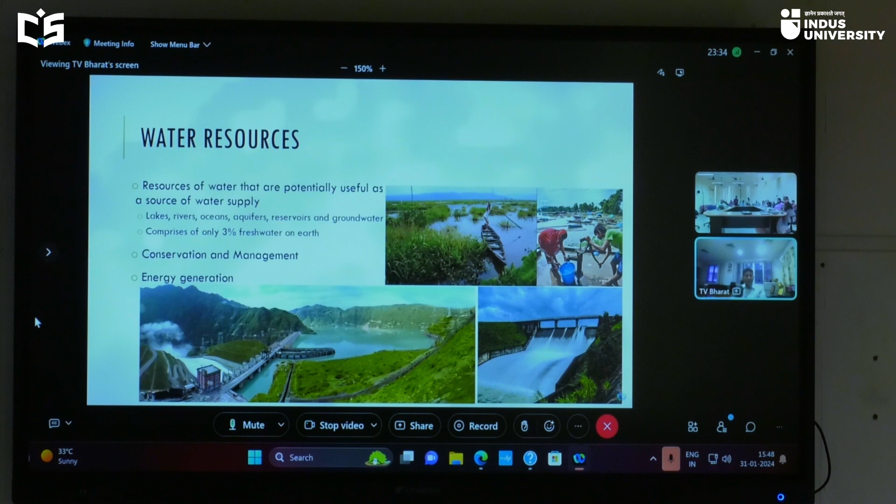When you talk about water resources, which is one of the prime subjects under civil engineering, it is essentially to manage and conserve the water resources, which are pretty much like lakes, rivers, oceans, aquifers, reservoirs, and groundwater, etc. Except for oceans, freshwater resources are around 3% only. So when we talk about management, it is the management of this 3% of freshwater on earth, because the rest is in oceans. Even now, we are trying to tap those waters and use them for drinking or other purposes.

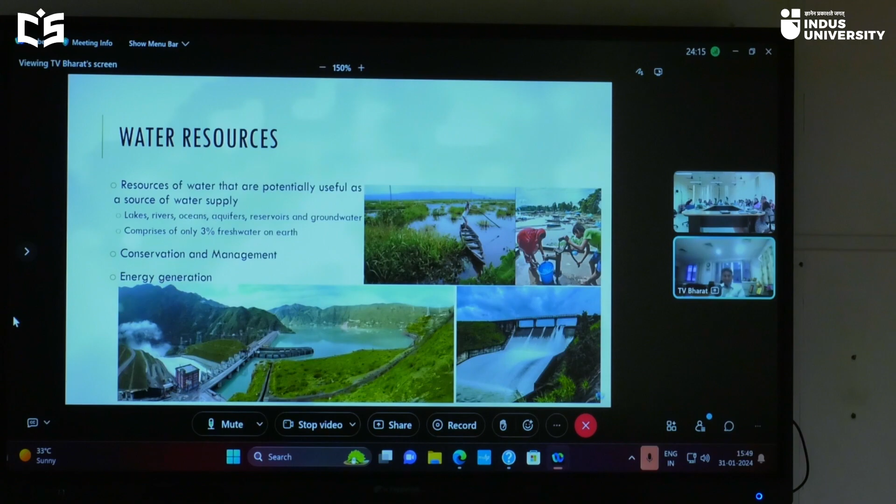There is also another important aspect in water resources, which is energy generation through hydroelectric projects and other things. So pretty much this is encompassing the water resource field at present.

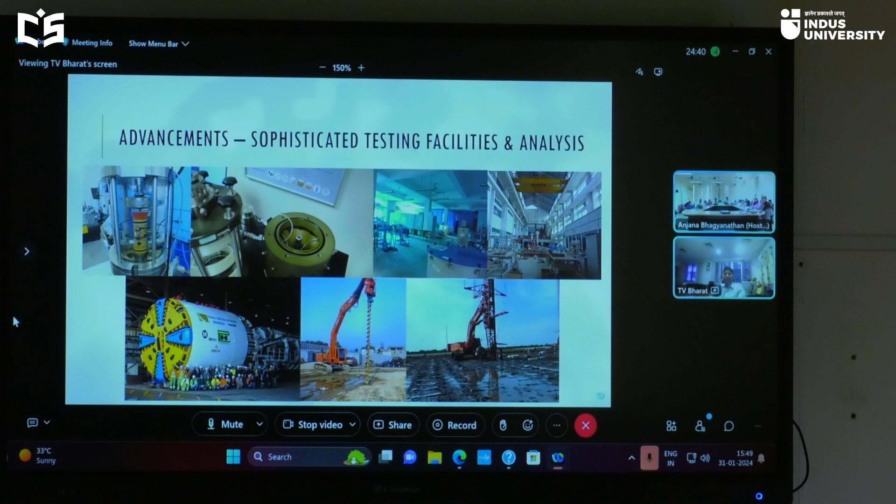There are advanced techniques that have been developed in areas like water resource engineering and geotechnical engineering to manage and mitigate certain problems and manage the resources, especially for example creation of dikes, treatment of groundwater, and many other techniques, including detection of groundwater using geophysical techniques. All such techniques are available. There is also creation of hydraulic structures such as dams, reservoirs, etc.

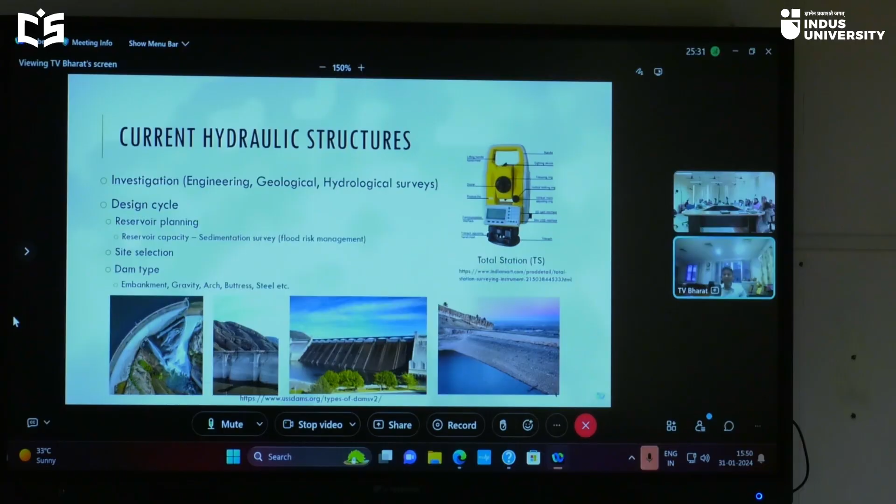Very nicely prepared modules are available for the creation of these large water bodies or structures. Surveying is a very important part of this—total station survey, and even now satellite surveys are also commonly used. Reservoir planning and life cycle assessment are very, very important for the creation of these large water bodies and structures.

To detect groundwater availability under the earth, there are geophysical techniques, starting from drilling to remote sensing and many other things. So this much advancement has taken place. Now the question arises: what kind of IKS, or Indian Knowledge System, intervention are we looking at from this point of view? That is what I'll try to address.

Whenever you talk about water resources combined with environment, very often there is a conflict. For example, this is a hydroelectric project in Himachal Pradesh where I was a consultant, called Kol Dam. This particular spillway got pushed towards the water body, and the structure got a huge wide crack. For repair work, during the dry spell, they created a dike by dumping resources, and water was extracted from here. There's a huge utilization of certain chemicals for creating hydraulic sealings within the water bodies.

Similarly, when you create hydroelectric projects, this is about a 44 megawatt hydroelectric project in Arunachal Pradesh, place called Rupa, where I've been involved. Huge landslides took place, and the tunnels got blocked because of a landslide that happened around 2-3 years ago during COVID time, and after that it triggered again the next year. Such environmental challenges occur because the landscape is changing due to creation of these water bodies.

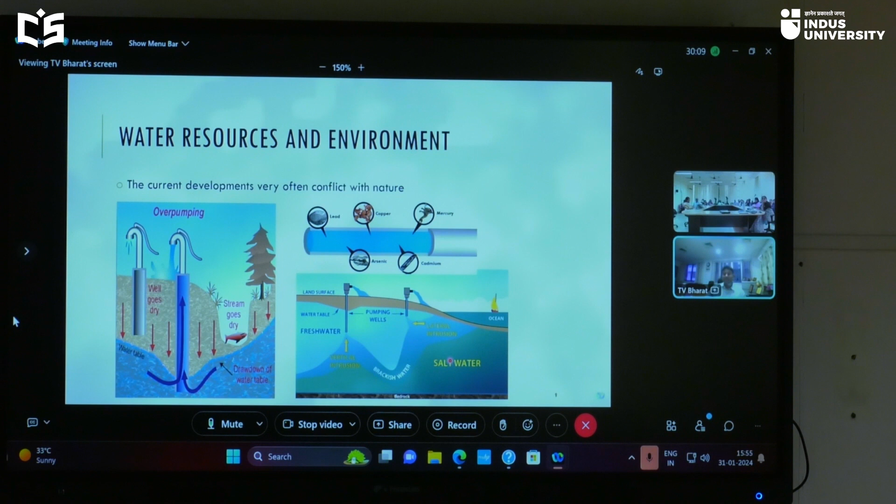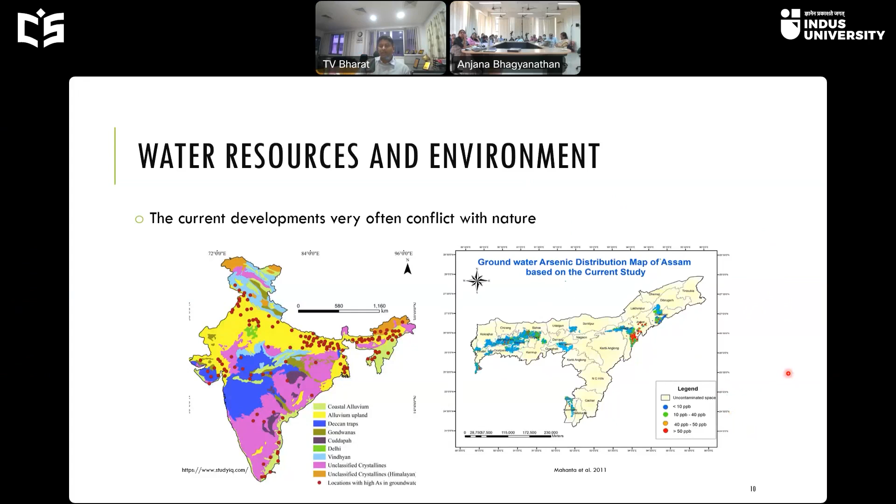This gives some idea of how the heavy metal called arsenic is distributed across the country, as well as in the Assam region itself. A very high percentage of arsenic is currently available in many parts of Assam, because although we have a huge water body like the Brahmaputra River, most of us are dependent on groundwater, and this groundwater is completely contaminated with heavy metals.

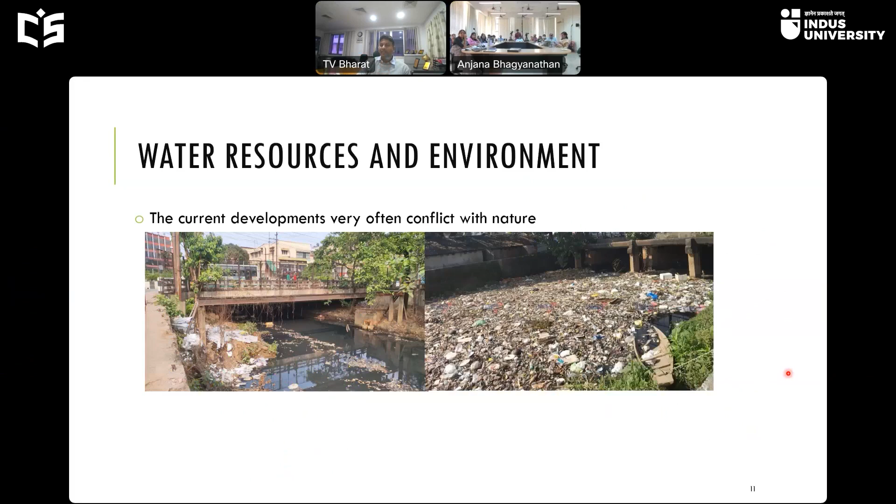Apart from that, there's the way we treat water bodies—by dumping waste directly, creating lakes as drains, or creation of drains, and simply discharging effluents from industries directly into the water bodies. The current treatment is just whether BOD or COD markers are achieved or not; if they're within limits, you can simply throw the effluents into the water bodies. Otherwise, where do these industrial effluents go?

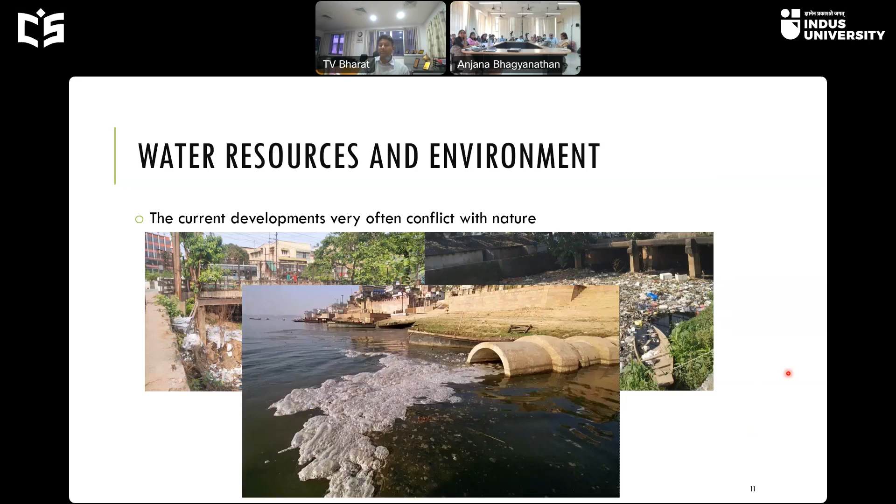I'm sure many of you are aware of Bellandur Lake in Bangalore, where surfactants polluted the lake recurrently many times. This happened repeatedly over many years, because surfactants from industry directly entered Bellandur Lake and created this kind of situation.

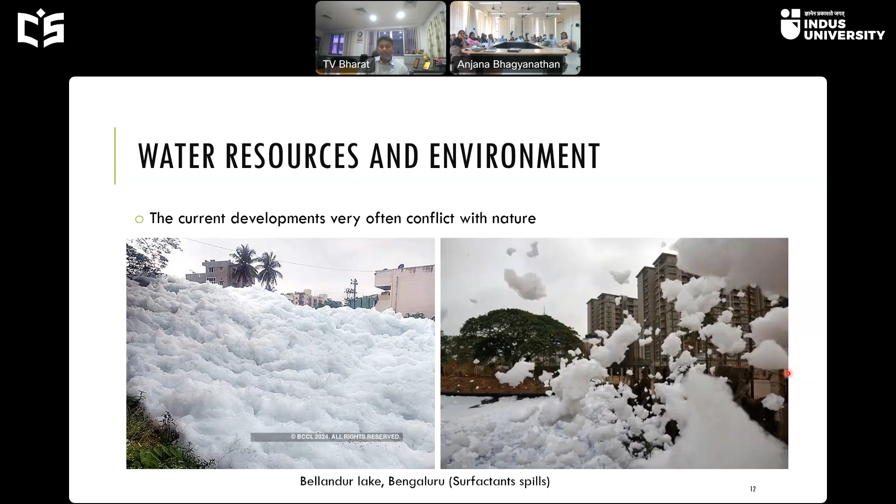The problem is whenever new wastes are introduced, such as construction and demolition waste, called C&D waste. Wherever you demolish a building, that cement or concrete waste, if mixed along with the MSW, releases high ionic strength salts. Then the osmotic efficiency of the liner or the bentonite available there would not contain the waste. It will simply allow the waste into the ground.

This practice has been existing for ages or several decades. But now a lot of research is going in, which means these concepts are not completely backed up by research. They are still in developing stages. We are still risking our environment because these contaminants are entering into our food cycle. We are still allowing it because our research is not completed. This is the fact.

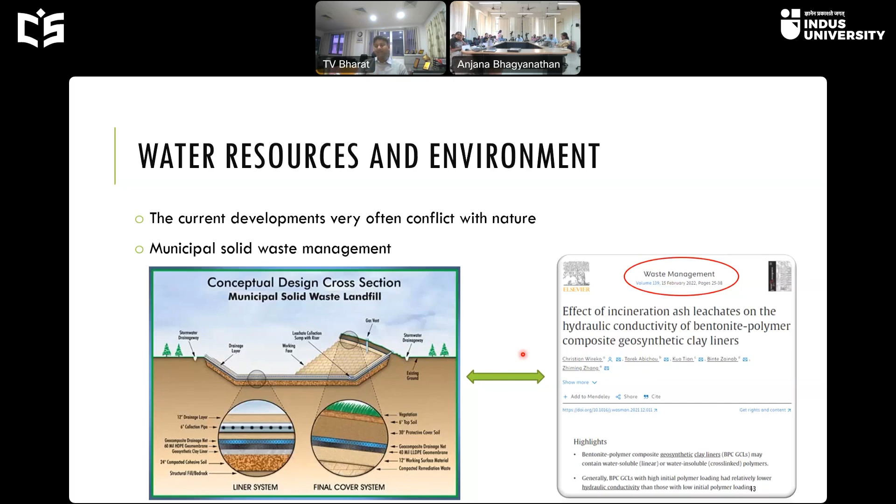But here my focus is not on waste management, but rather on water harvesting systems. What I showed you is that currently, whatever practices we have, often there is a conflict with the environment. We are in a fix about how to protect the environment at the cost of development, or at the cost of creation of energy, or at the cost of hydroelectric projects and extraction of energy. That is where we are.

These are some of the water harvesting systems we get to see even now because they are still existing. But are there any sources or references to understand how these things were made? Let us try to explore a bit.

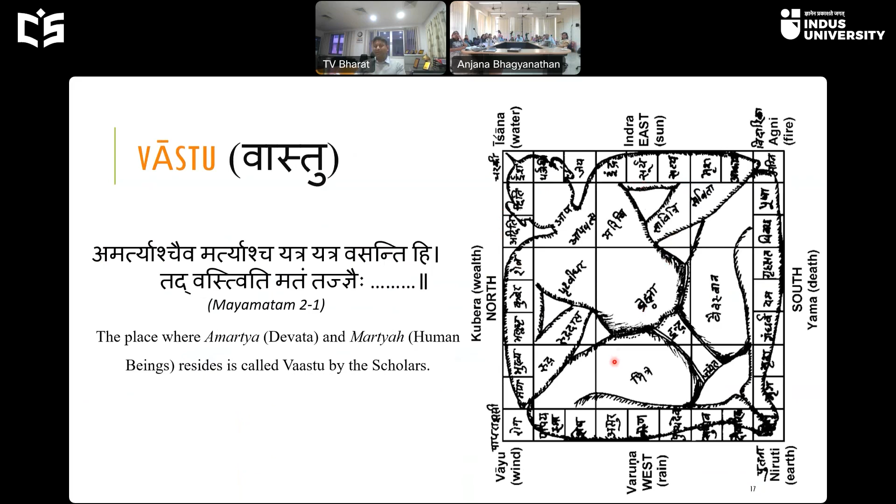Only the creation of spaces, urban space, or any other space, for creation of a building or something. But this is also Vastu because devatas exist there. Amartyascha Martyascha Yatra Yatra Vasantihi Tad Vastviti Matam Tajjnaih iti Mayamatam - Mayamatam explains that Vastu is where the Amartyas, Devatas, and humans coexist together. Therefore, based on the presence of these gods or demigods, the placement of different vastu or rooms, or the creation of spaces, is actually discussed.

But Vastu is a very wide subject. I'm sure before me, the speaker would have spoken from Samarangana Sutradhara, because based on the brochure, I know there's one specific talk on Samarangana Sutradhara by Bhoja. Actually, it starts from a detailed explanation of the universe creation or universe evolution.

And there are so many questions that Jaya asks the creator, and then he asks what is the shape of this particular earth, how this whole creation actually happened, and even how to create one particular soil, how to make the soil stand without collapsing. Such kinds of questions have been asked, and a very detailed treatise has been given there.

And in fact, it also discusses the mechanical contrivances, or the yantras. There is a yantra adhyaya in Samarangana Sutradhara. Right? So apart from that, there are hydraulic structures, which are not there in Samarangana Sutradhara very explicitly, but material selection and such kinds of planning are definitely present in most of the Vastu texts.

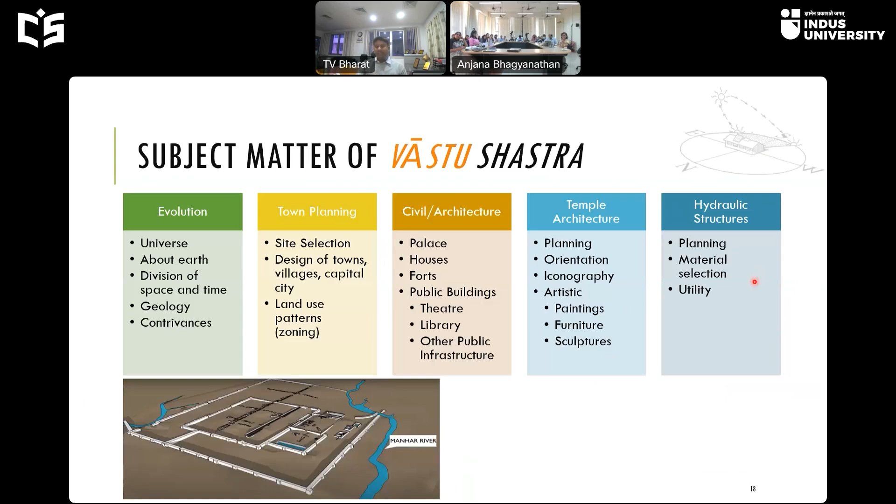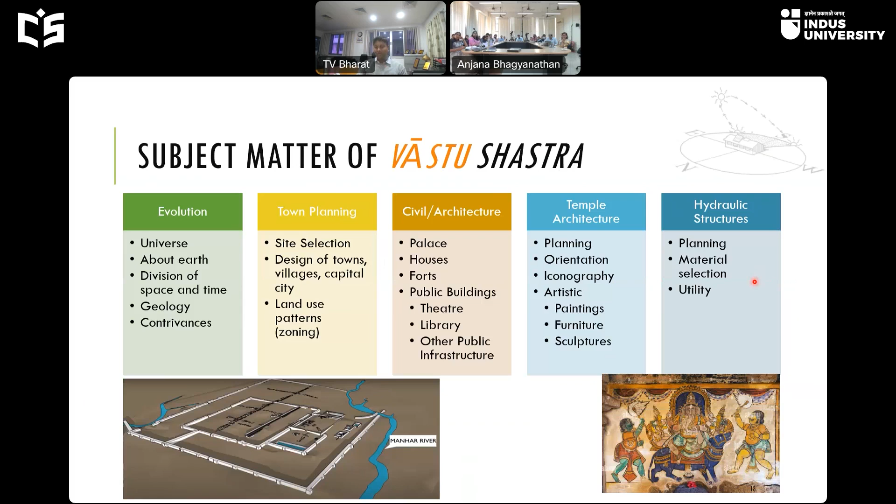So we get to see from the Harappan civilization, near the Manhar River, etc., the settlements and how this particular planning has been done, and also artistic things in many of the temples, which existed for thousands of years. Most of the companies who advertise paints would not last even for 10 years, right? But these existed for thousands of years on rock, and they are natural, organic.

So Vastu is a subject matter which has existed throughout history, and therefore it is Sanatanam, eternal, and it has a mention in the Rigveda, where Vastoshpate is addressed: Vastoshpate Anamivo Bhava. Actually, the one who bestows health. If you recall one of the slides I showed you, we did not really think of what happens to health when we discharge effluents into rivers or water bodies. But here, Vastu, if it is followed, actually protects the health of inmates, the health of all living organisms. So that is how Vastu has been used.

And there are Pravachakas. This is mentioned in the Matsya Purana. I will not detail it because I think I've been given only 40 or 45 minutes, I guess. Otherwise, this is a very nice verse. Bhriguratrirvasishtascha vishvakarma mayastata narado nagnajichaiva vishalaksha purandara. So these are all the preachers of Vastu. There are books from them also available, or there is a Shishya Parampara that actually came from them.

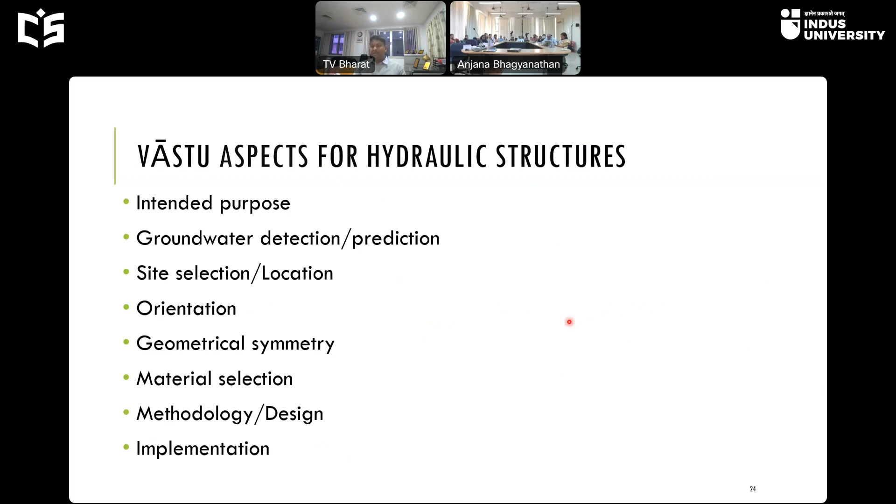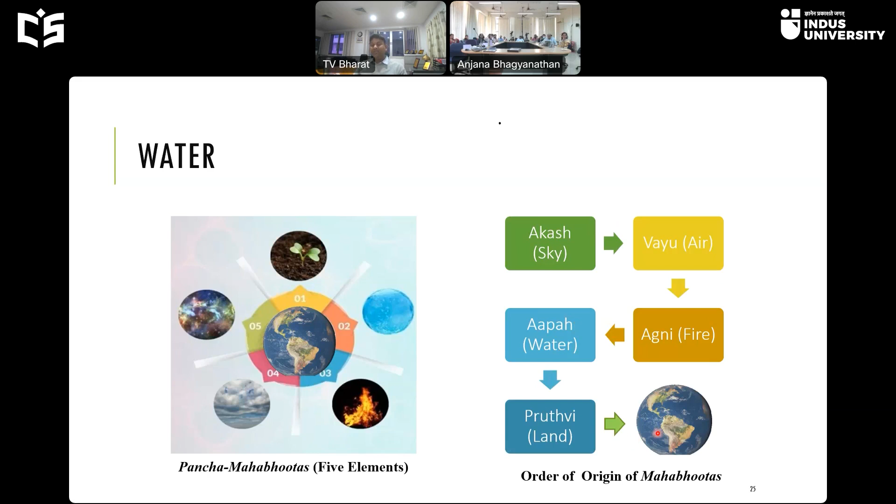What is the perspective of water, the Jala, in ancient India? This is one of the Panchamahabhutas, of course, which are useful for the creation of all different things on earth. There's a shloka in the Bhagavad Gita also: Akashad Vayu, Vayor Agni, Agnir Apah, Adbhyah Prithvi. There's the creation of Mahat, then these Panchamahabhutas, and after that all different objects. There is such a discussion at the beginning of Samarangana Sutradhara as well. This philosophy is vital for understanding material and the creation of any space.

The means of knowledge in ancient India is through the pramanas: Pratyaksha, Anumana, Upamana, Arthapatti, Anupalabdhi and Shabda. Without these pramanas, it is very difficult to understand, evaluate or predict anything. Pratyaksha Pramana is getting knowledge of a thing through a connection between the eye and that object. It could be the eye, ear, nose, or tvak, the charma, the skin. Through these indriyas you gain knowledge. But this is not sufficient, because when the indriyas directly contact these objects, you will not gain the entire thing unless there is an involvement of manas.

Because you will be looking at something, but you will not be gaining the knowledge unless the manas is also linked, and manas is actually bridging this eye with the object, right? So this pratyaksha pramana, these pramanas are so important to evaluate the knowledge, such as, for example, the groundwater prediction in ancient India is based on understanding or presence of certain features.

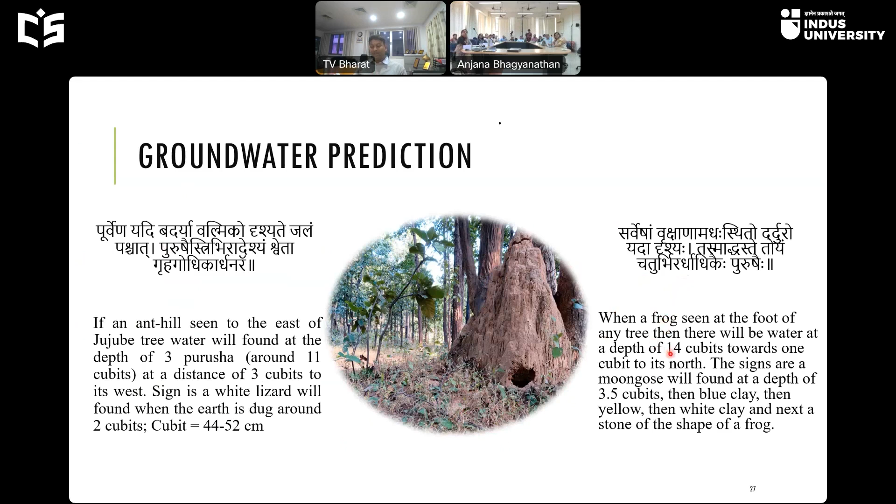And similarly, if you have seen a frog near any tree, near that you have water bodies, and there are certain other pramanas that have been given. Similarly, the presence of certain plant varieties also provides you information about presence of groundwater. So although it appears that this is very simple, and does it really work, right? But in fact, there were people who used to practice.

Professor Prasad from Sri Venkateswara University or Padmavati University from Tirupati used to provide solutions to many places, like Gujarat and many other places, where in the dry places he used to find water bodies based on these pramanas. This was in the 80s and 90s. Now he is no more.

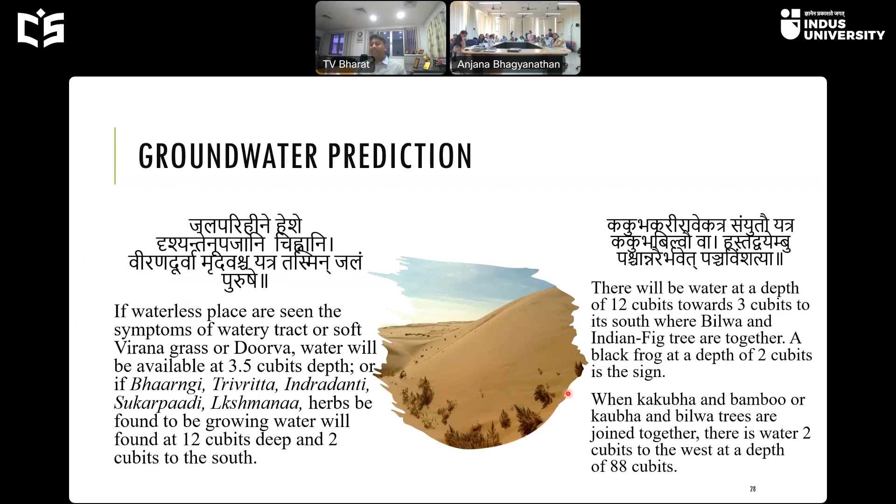So this particular knowledge is still valid, because there is a relation between certain vegetation, the plant biomes, and the water bodies that are available, and also the soil biome, lithosphere. This particular knowledge has been utilized for understanding the presence of groundwater.

Similarly, there is a certain discussion on the soil classification system. So Sita, Rakta, Pita, Krishna, these are the different varnas of soils, or colors of soils. So based on the colors of the soil, and similarly based on the smell and taste of the soil, and also the presence of different plant varieties, right, the soils are divided. So it appears that there is a Brahmana, Kshatriya, Vaishya, Shudra. Nevertheless, this perhaps means the utility of the spaces or of the soils for different purposes.

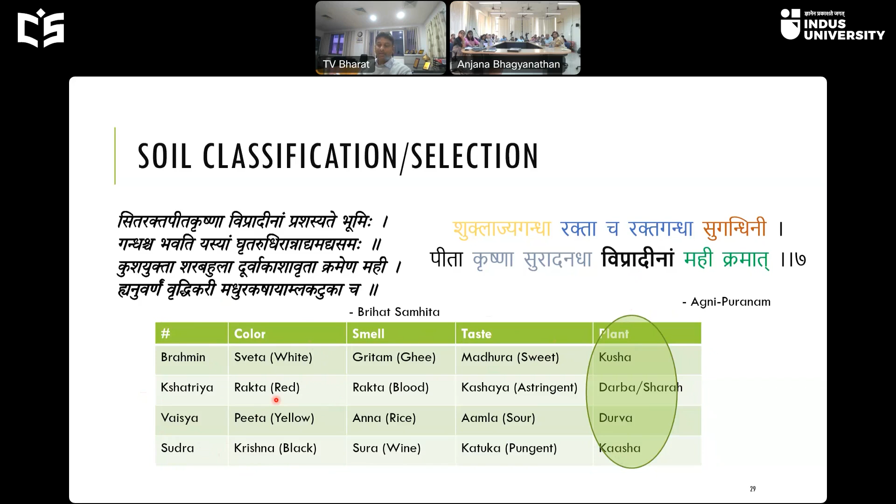For example, if you want to create a space which regenerates your mind, which regenerates your thought process, the Shvetavarna is ideal, right? And similarly, the Raktavarna, the red soil or the laterite soil, which contains high iron oxides. You will see in many places, mountainous regions, etc., that iron oxides are dominant, the laterite soil, red in color.

So if you have this particular soil, then the contractor will be very happy, because this is abundantly available, and this soil could be used for achieving a very good compaction. So you can go to very high compaction energy and then achieve very high densities. So this soil is good for creation of even large structures. So there is a kshatriya, where protection systems, etc. are required. So you can create perhaps large structures.

Similarly, this is a widely available land. There's a Pita Varna and Krishna Varna, which is related to planting and other things, there is krishi, and similarly there is creation of pots, etc. So these are directly dependent on this particular soil. So this is the utility of soil that is actually talked about.

And in fact, there are many other ways to classify the soils, because soils do not mean just presence of grains and water. That is a modern perspective of soil. But soil means there are certain microbiomes, from plant biomes also, that are available within the soils, and also there are certain micronutrients. These are all useful for nourishing bodies, physique, everything. So therefore, there is a direct relation between the type of soil we are living in and the way we behave. So the soils definitely would influence us, and that is how the classification has been done.

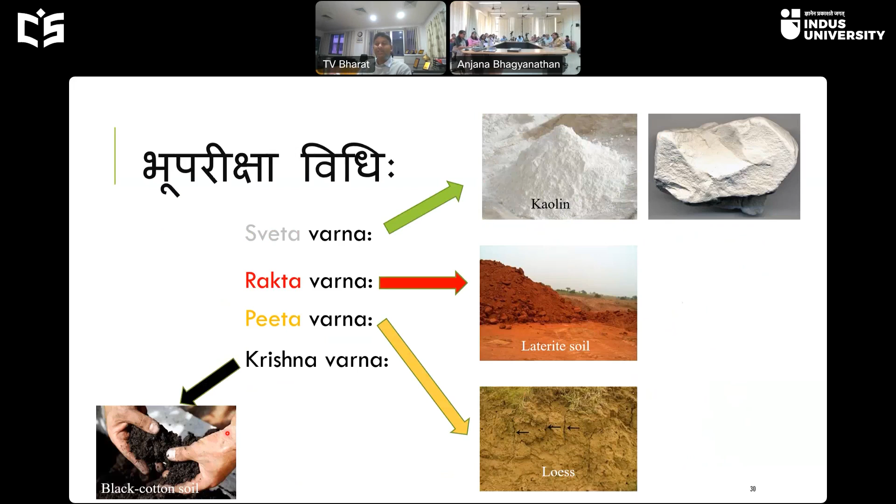And in many a place I do teach this particular course on Indian knowledge systems. Many a times people ask me, is it really a scientific approach of dealing with classification or any other thing? I explain one thing: the pramanas are something like this.

If you have one bird which is flying 2 kilometers away from the water bodies, and suddenly it sees that there is a small perturbation in the water body, it dives down and catches its prey. It dives down 2 kilometers to catch the prey. Did it see the prey? It's not possible. Even the cameraman could not capture the prey before it caught it, right?

So it is not possible, only based on the perturbation. The perturbation could be a natural perturbation, or it could be the presence of certain prey. So these pramanas are so powerful. Similarly, the marine snails can detect their food source simply based on the smell of the food, and they would not know where the food is until they use their sensing glands.

But humans have all these senses working, and the utilization of these sense organs is a main theme to understand or acquire knowledge. What kind of knowledge? For example, if you are trying to understand the type of soil, you ask the plants, because they live in there.

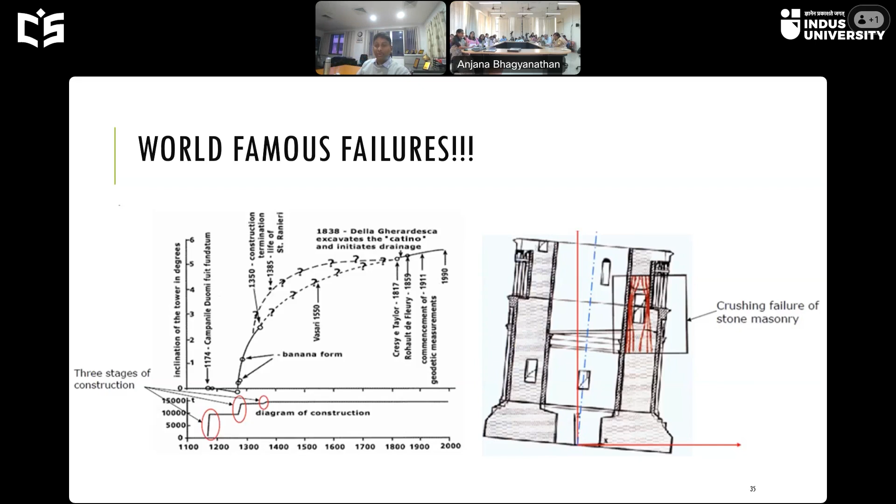Even now, the three-phase or two-phase systems are very difficult to deal with because there is no inclusion of microbial activity or micronutrients. And if you include them, it becomes a five-phase or six-phase system, and God knows when this will be solved. Some ancient structures based on this knowledge system are available even now. The first one is the Anangpur Dam.

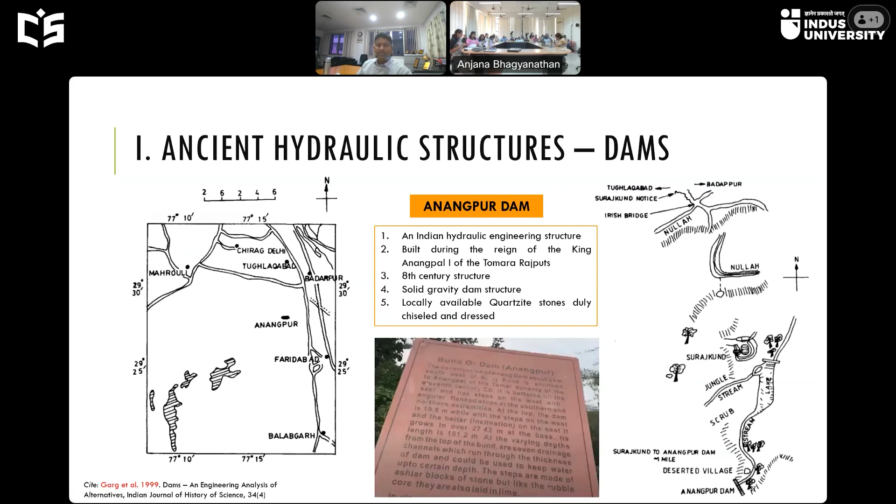The Anangpur Dam is situated near Delhi in Faridabad, at the foot of the Aravalli Mountains, and it was created nearly thousands of years ago. The interesting aspect is that all these aspects were considered in it: reservoir planning, site selection, material selection, dam type, etc.

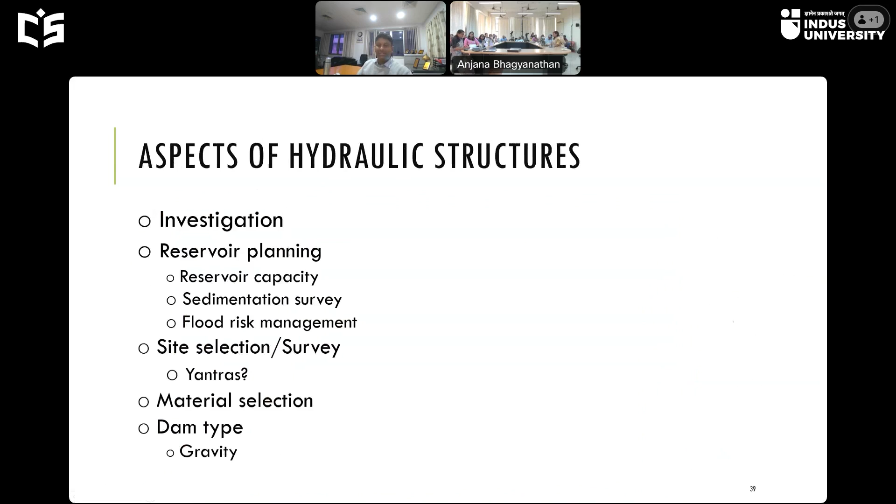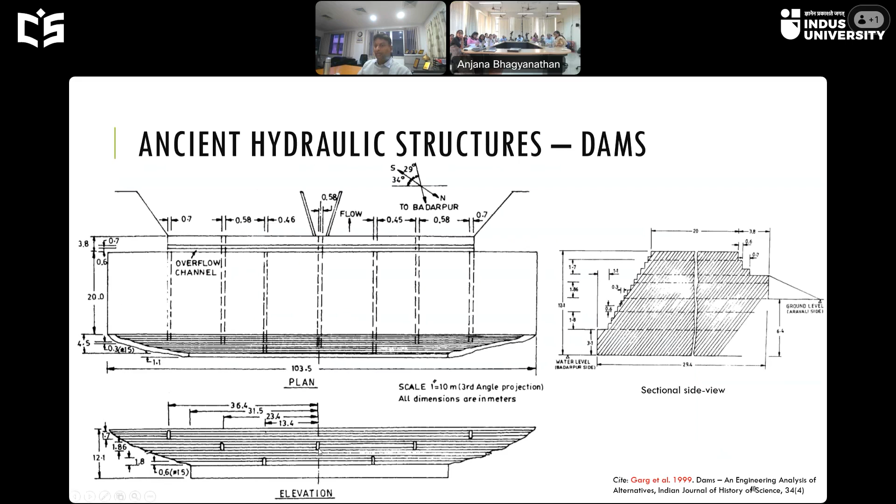These are the holes through which you can put the sluice gates and then control the water body depth on either side. On the upstream side, you can control the water body levels. So for that, these water channels have been given, and these are the sluice gates. And this is the currently existing dam structure which is intact. These are the quartzite stones, and you have mortar as well.

This mortar survived for more than 1,000 years, right? So imagine a structure which was built 1,000 years ago. What is the revenue that would have been generated if this particular dam had been used for 1,000 years? Huge revenue, right? Because whatever dam currently exists, beyond 100 years you will not see that particular dam existing, because what we are currently using is concrete as mortar.

The concrete or cement has an age of about 80 years. Beyond that, it is not useful. It cracks, right? So therefore, the life of any given hydraulic structure currently is maximum 100 years. Beyond that, it doesn't have a life. But here, the life is even beyond 1,000 years.

And if you see the factor of safety against overturning, sliding, etc., that means the stability of the dam, it is very high. Of course, this has been evaluated based on limit equilibrium techniques. Currently, we are considering earthquake-related factors to see what the exact factor of safety would have been, because this is near the Delhi region, a very high earthquake zone. Therefore, those factors also could be considered. That is how this is standing tall even now.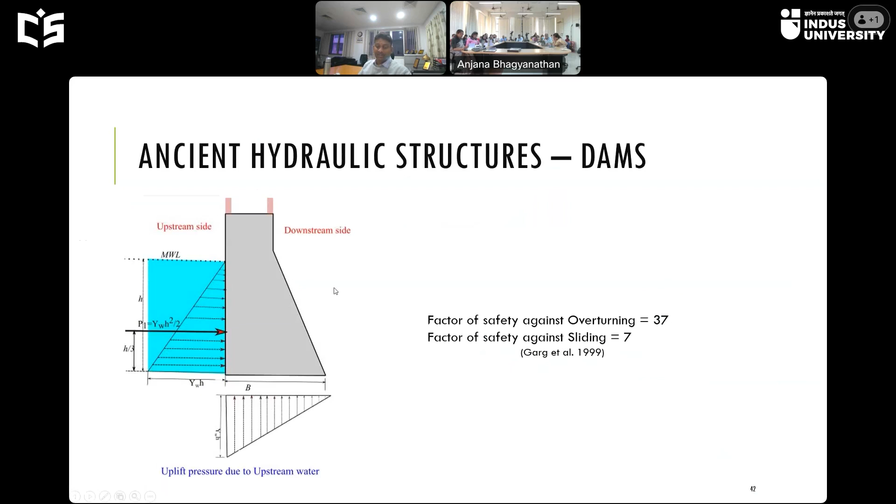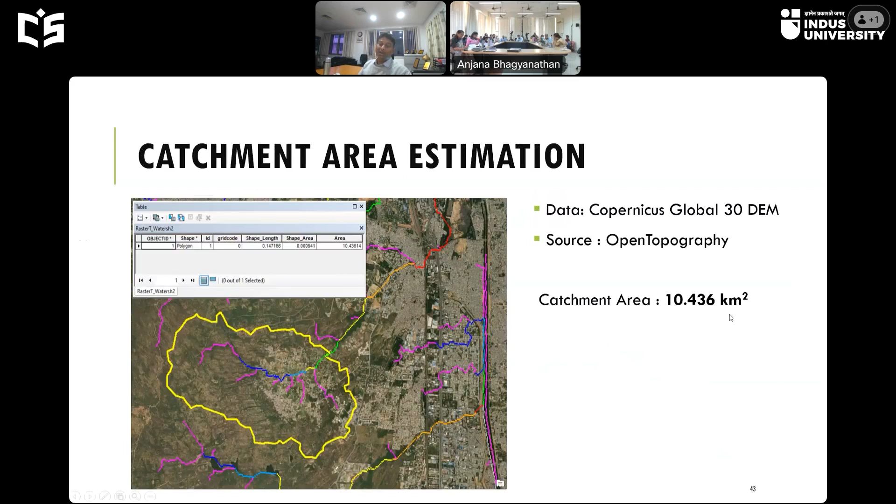This is the satellite data of the present dam area, the upstream area, which shows the capacity to hold water; the catchment area is about 10.4 square kilometers, a huge area. That is the catchment area from where it draws the water, right? But unfortunately, currently this whole thing is a human settlement. So this is the Anangpur Dam, on the upstream side these are the mountains, and this is the occupation or the human settlements. So they were unknowingly sitting on a treasure.

Because where the groundwater levels are depleting, where they were fighting for water, they were sitting on this, unknowingly that this can provide a good source of water if this particular thing is in operation.

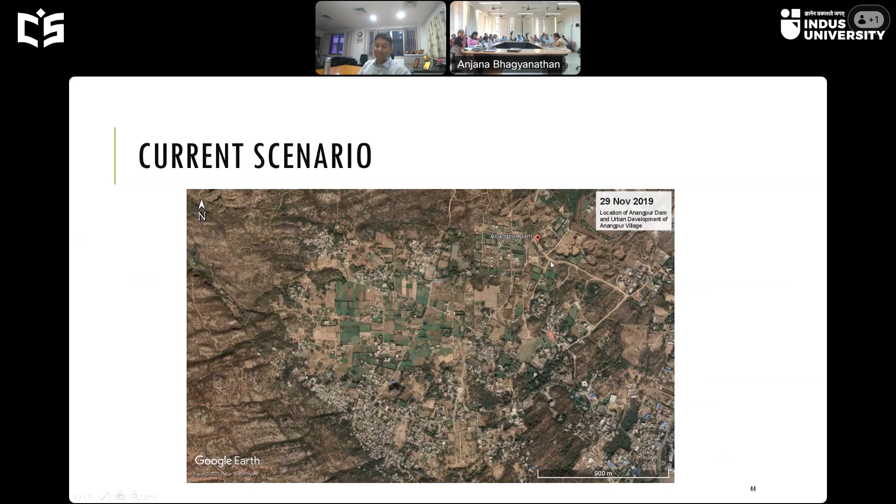Another one is the Kallanai Dam, which is again more than 2000 years old, created by the Cholas. If you look at the dam height, this is very interesting. The dam is only 5 meters tall. And the earlier dam, Anangpur Dam, is only 12 meters. So please pay attention to these dam heights. Dam heights were always kept low in ancient India, right? And this is operational even now on the Kaveri River.

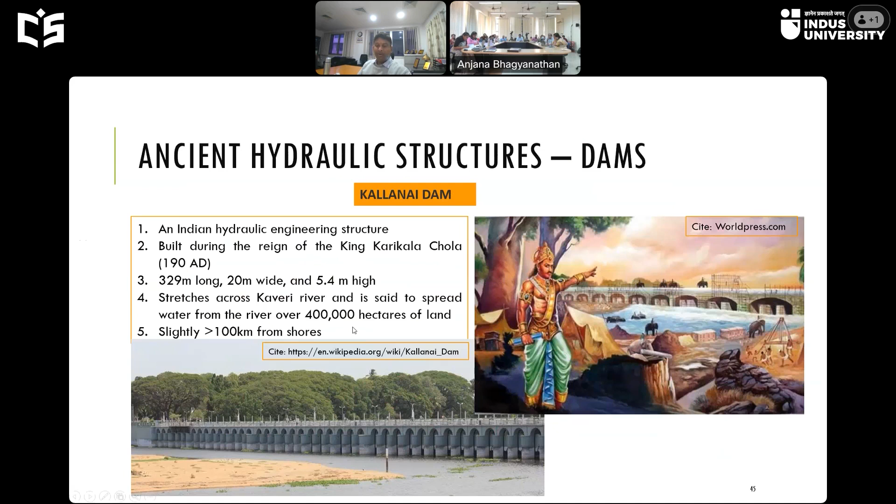Let us review the current status of some of the dams we have. This is the Sardar Sarovar Dam. I've simply taken this from Wikipedia. In 1999, when this was constructed, the height was 88 meters. In contrast to the earlier dams, this is a huge height because it generates electricity as well. So 88 meters, but over a period of around 10 years, the height of the dam had to be increased to 138 meters. So look at the planning that was done before the creation of this particular structure.

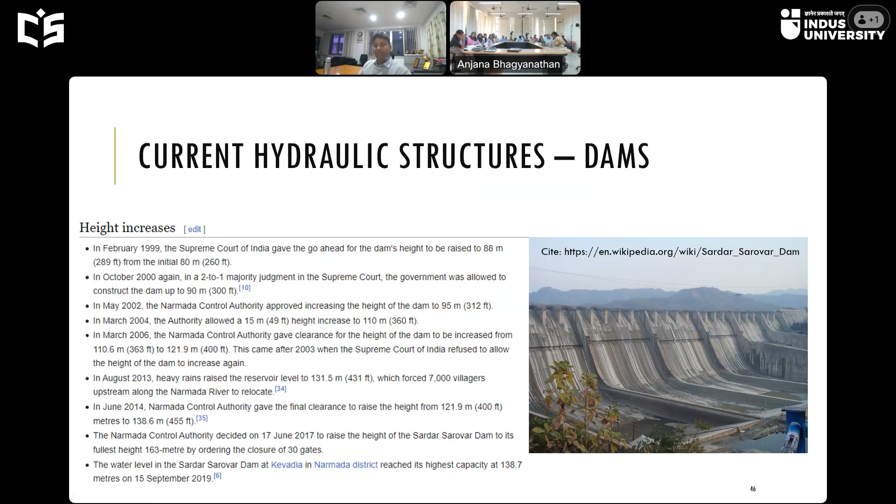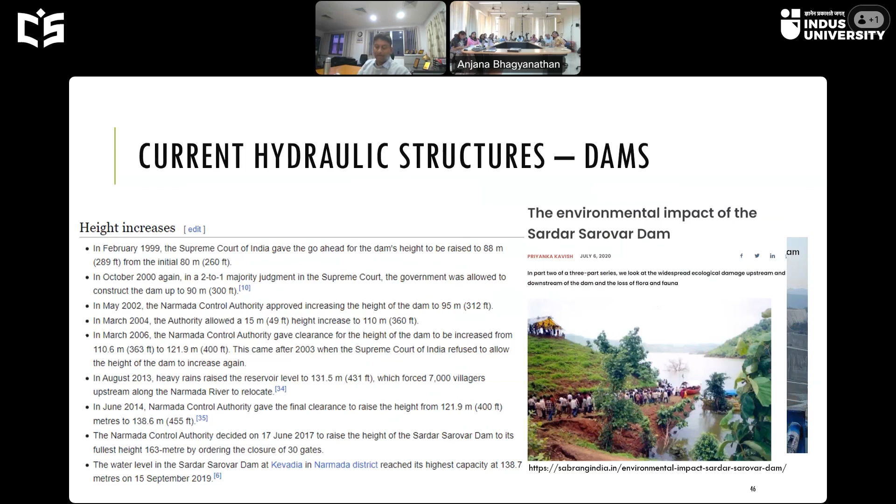Because of the continuous increase of the height of the dam, there is a huge environmental impact. One thing is, as I mentioned, there's depletion of the groundwater on the downstream side, which causes seawater to intrude into your groundwater space, and this makes the land unusable for farming or anything else, because salt water enters your groundwater body, right? That created a huge environmental impact.

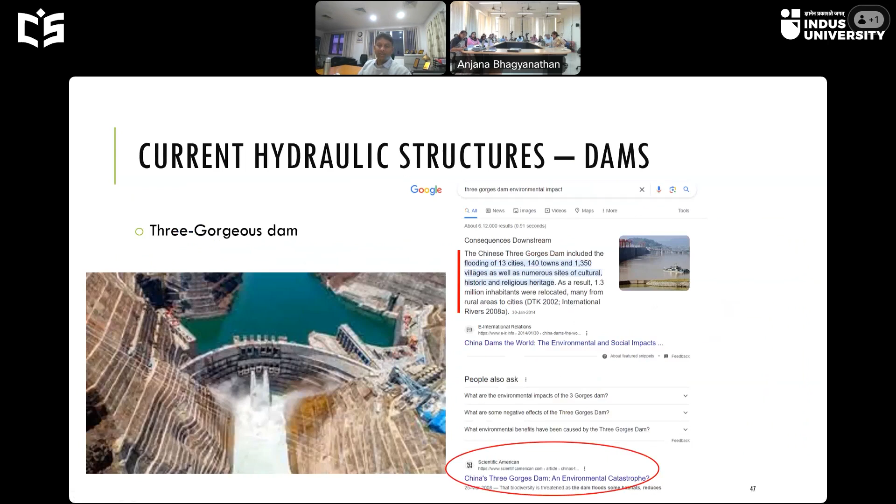Even huge dams like the Three Gorges Dam have a similar impact on the environment, a huge environmental catastrophe from the creation of these dams. Second thing, these dams are made of concrete. So carbon dioxide emissions are directly related to the amount of production of cement or concrete.

So China tops because China produces the most of the quarrying and transport, and this clinker was produced by China, and it tops in the production of CO2 emissions as well. So this is at huge environmental cost, creating these spaces. And the longevity, as I said: beyond 80 years, this cracks. So you have to be careful that these particular dams will not be useful beyond that.

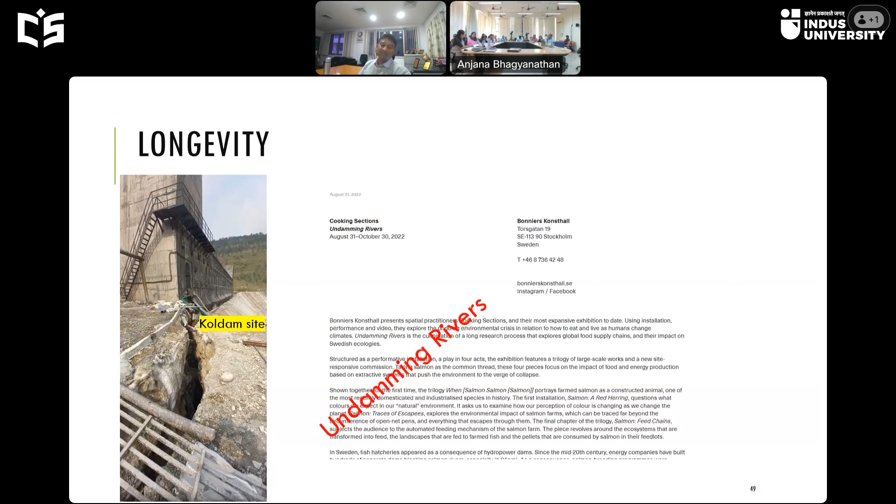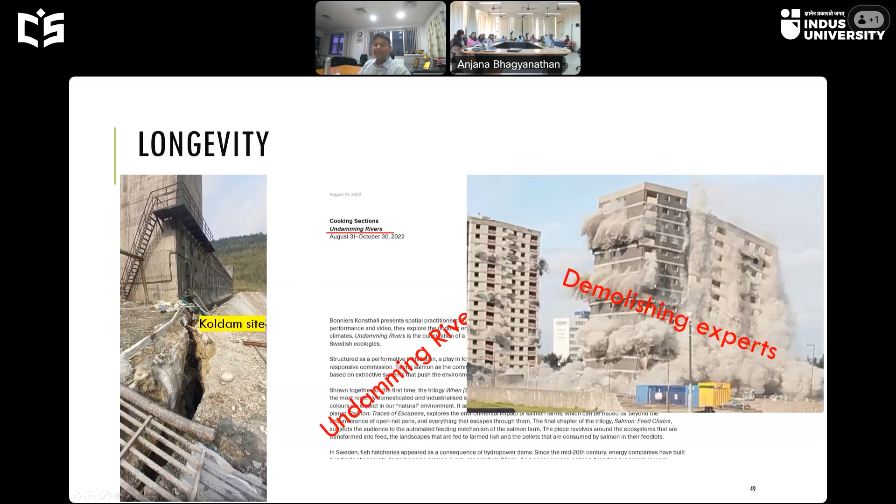So now a new practice has come, a new profession has come, that is undamming the rivers. So you have to demolish the concrete structures. If the life is nearing its end, then it has to be demolished. So there are experts who can demolish this. And this particular waste, called construction and demolition waste, which constitutes about 10 to 20% of the municipal solid waste, creates a huge environmental problem.

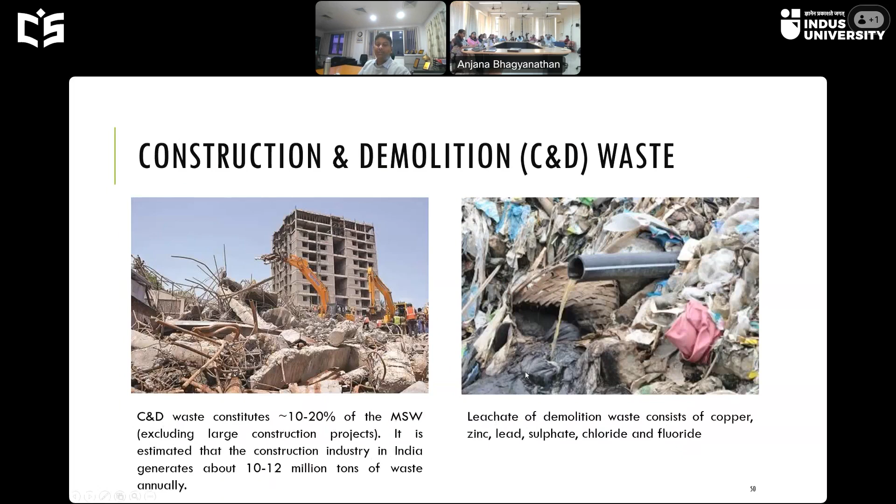First and foremost, apart from the heavy metals, it also produces high ionic strength salts, which come into our food cycles and which are very harmful. And these leachates that are produced are contaminating the groundwater. So this is a huge environmental impact that we are currently facing.

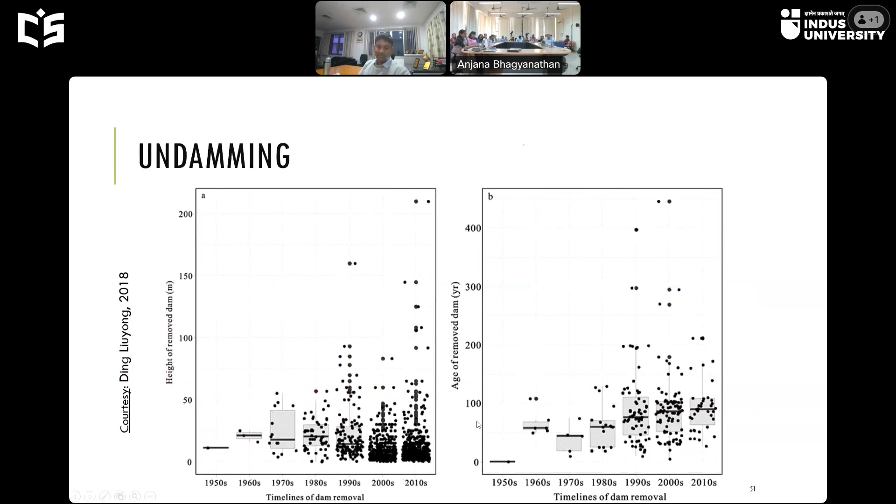And this undamming, you can see at what rate it is happening. So in the 2010s, that means 2010 to 2020, this many dams have been demolished. This is the height of the dams shown, because the age is over. So the age of the removed dams is also shown.

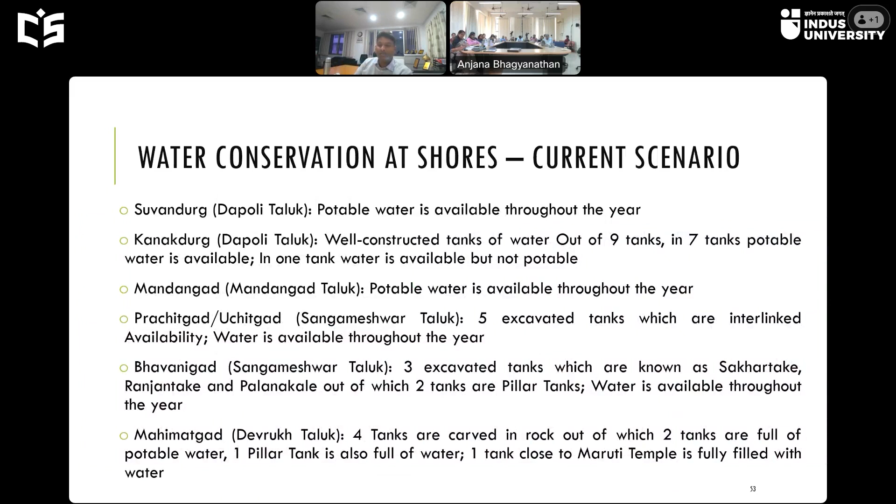And this was the last point, where it culminates into the sea, where it was tapped and a reservoir has been created. Many such reservoirs exist even now. They're operational. Some of them are not maintained well, so they are not operational. These are all in Maharashtra, near the sea.

And similarly in Mandu, this is on the hillock. A very interesting aspect; in fact, you can draw similar things and apply them to current scenarios in hilly or mountainous regions. So Mandu, this is around 555 CE. More than 1200 tanks are available. These tanks are interconnected, so the water flows from one tank to another, and these are amazing structures available in Madhya Pradesh to see currently.

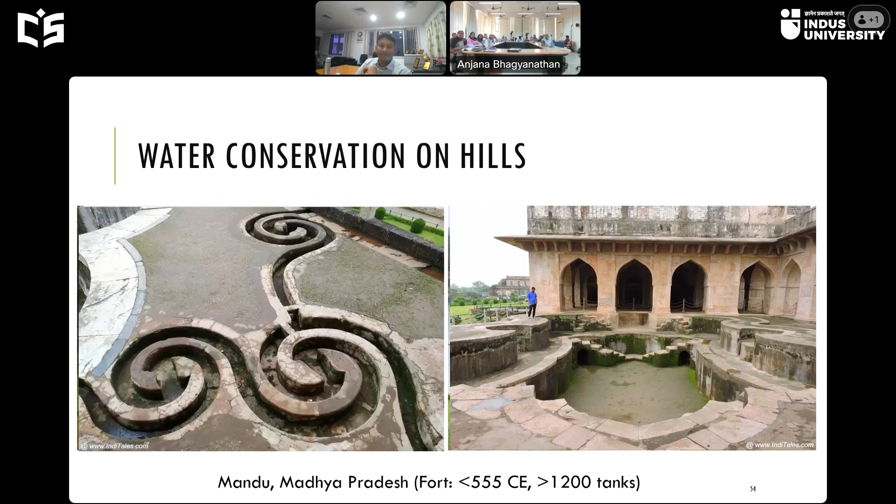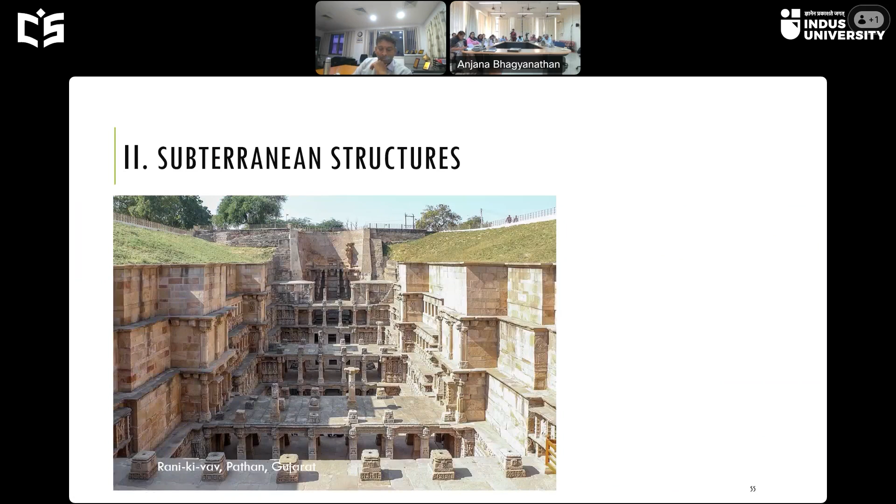And this is one of the very interesting structures called subterranean structures. So this is the ground level. Below the ground level, they have created spaces. This is called Rani Ki Vav in Patan in Gujarat. And near this is Chand Baori, Rajasthan, a similar space and slightly different. I'll try to explain in a bit.

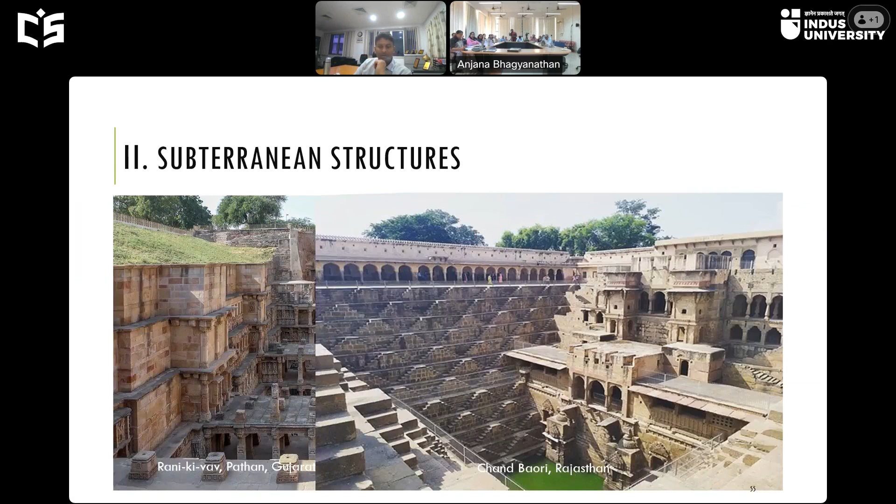And similarly, you have similar things even in South India. This is called Nagakunda in Karnataka. A similar space is available for reaching the groundwater and also recharging the groundwater, and also as a kind of water harvesting system. It works in all different ways. So this is a cross-sectional plan of the Nagakunda.

And this is Nadavari Koneru in Kanchipuram near the Varadaraja Swami temple. A similar kind of subterranean structure exists. This is in Rajasthan, Chand Baori, as I mentioned; this extends to 30 meters below the ground surface. And I'll try to explain the interesting aspects of Rani Ki Vav and what engineering marvel existed in those days. This is about 1000 years old, 11th century.

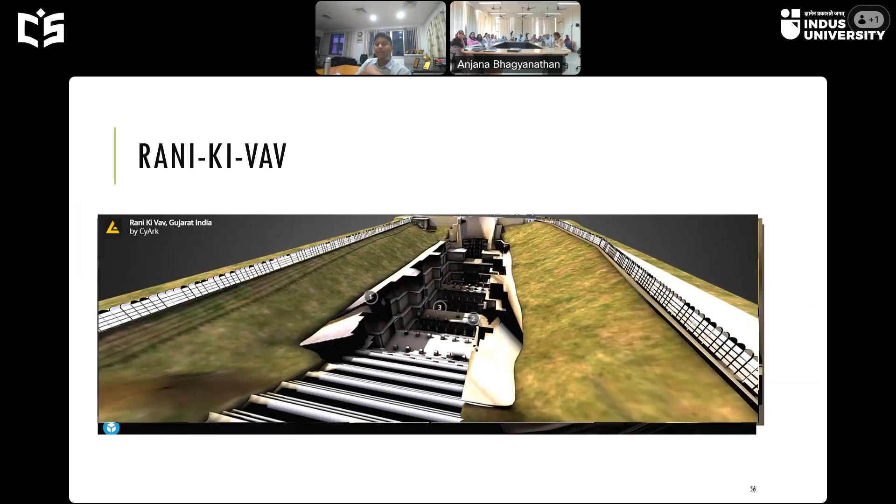This was created by King Bhima of the Chalukyas. In fact, the Nadavari Koneru and the Nagakunda in Karnataka were also built by the Chalukyas. So this is the structure, built with 7 stories, and people can go into these galleries; for example, if the water level is changing, they can reach different galleries to take out the water.

And these are not water bodies just to get water for daily use, I guess, because they used to have normal wells. Every household used to have a well, or at least there were many wells. So this is not for daily use. Perhaps this was intended for a larger water conservation project. And the very interesting aspect is that near this, there used to be the Saraswati river during that time.

When Saraswati was flowing, what is the need for construction of this particular space? That is also an interesting aspect which has to be seen, whether this intended purpose was that in the long term this should serve.

Here what you see is that both sides have retaining walls to retain the soil. And on one side, the farthest side, there is an arch type structure constructed by bricks. The side walls are by stones, sandstone, and this arch type one is by bricks.

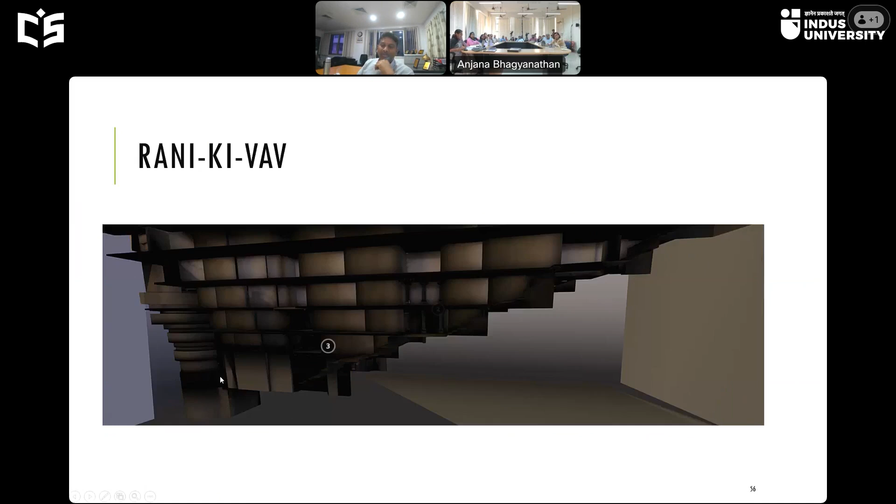So this is a tank at the farthest place. This is a cross section below the ground, how it actually exists currently. You have to go down like this to reach around 30 meters where you can fetch the water in the dry period. Otherwise water levels can change at different times.

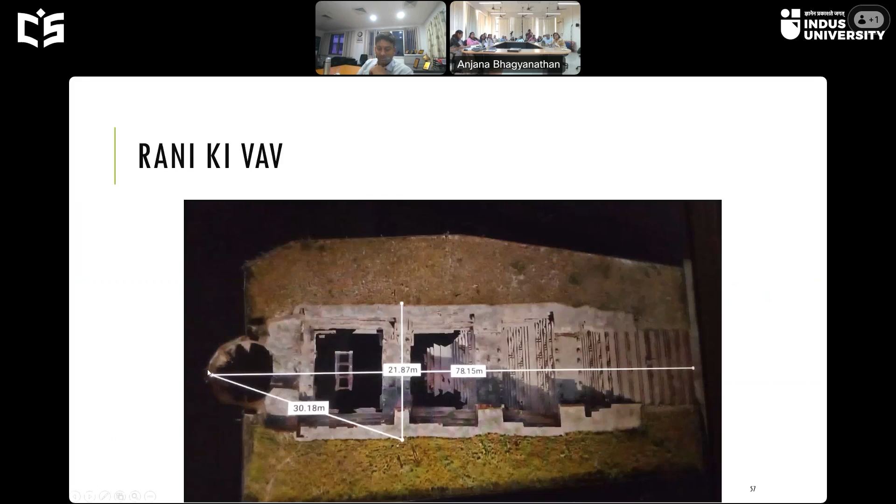So these are the dimensions of this particular Rani Ki Vav space: around 78 meter length and 21 meter width, and depth here also around 30 meters. So these are some of the pictures.

Orientation is given the very highest preference, in fact the highest priority when these spaces have been created. So this is Modhera Sun Temple nearby, created again by the Chalukyas during the same period. This particular temple faces exactly towards east, exact geographical east. Similarly, the Rani Ki Vav is also facing east.

What we recently see in the Anantapadmanabha Swami temple also, during the equinoxes, during sunset, the sun passes through these seven windows at different intervals and sets. This happens only on one particular day or two days in a year, only during the equinoxes, during March 21st. Another such day may be during the other equinox, around September 23rd. At other times it will not happen.

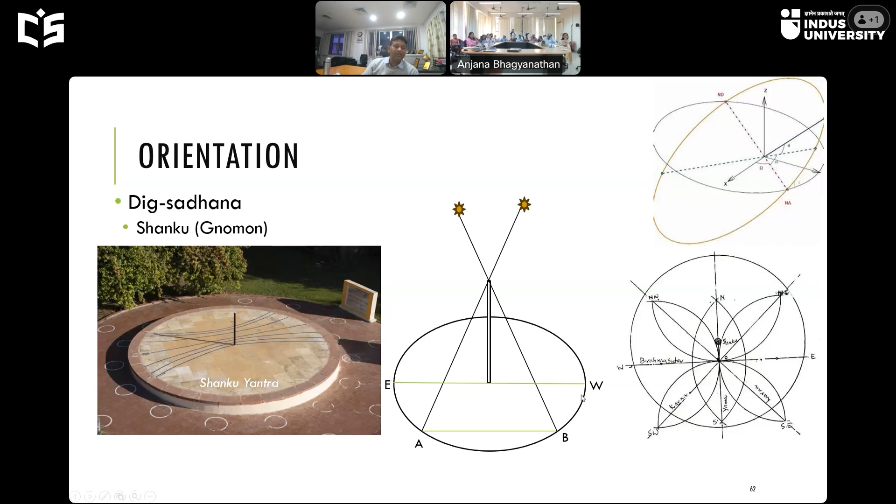Wherever this gnomon casts its shadow on the circle during the day and afternoon, when it leaves, if you connect these points you get a straight line that tells you the east-west line. But as the sun changes its position with time, because the earth has an inclination of 23.5 degrees, we expect a certain error. So on one particular day you get an accurate value, that is the equinoxes, vernal equinox and autumnal equinox. For other days, certain correction factors have been given. I will not go into detail.

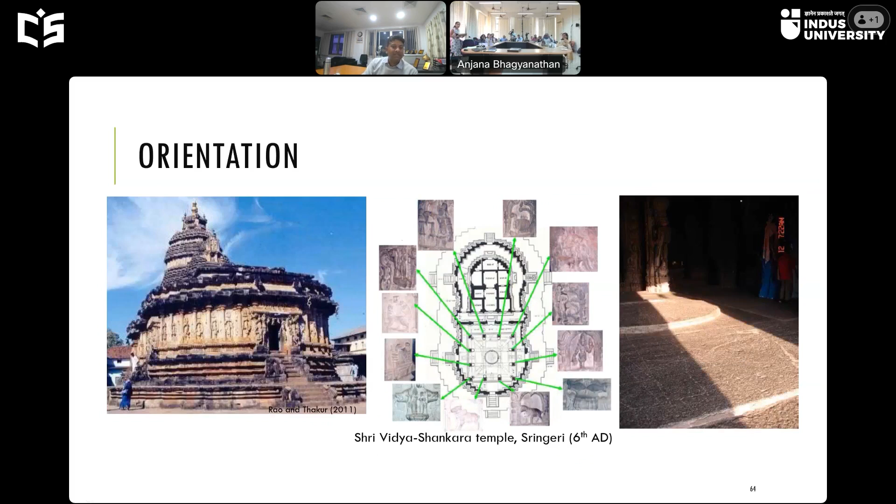Most temples actually have this phenomenon, called Rashistambhas, in the Mukhamandapa. These are not just to support the whole structure, but sun rays fall on individual Rashistambhas when the sun is in a particular Rashi. This is based on this analysis, but I won't go into detail since I need to discuss a few more things.

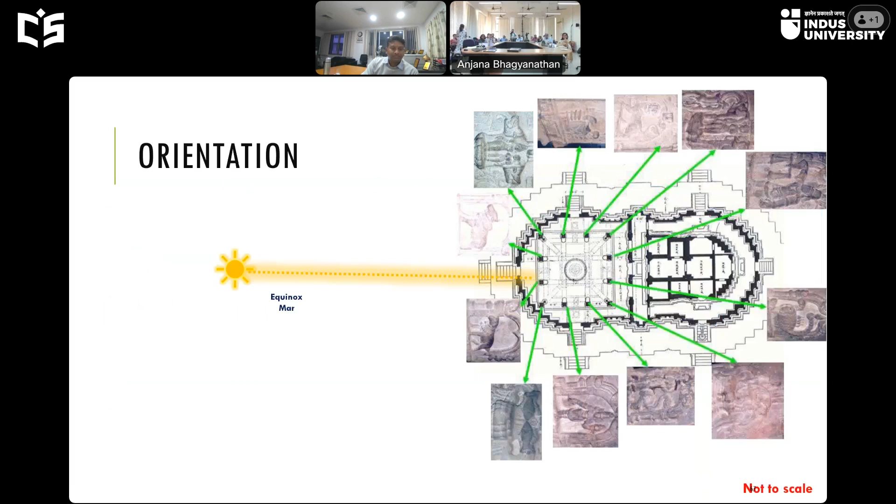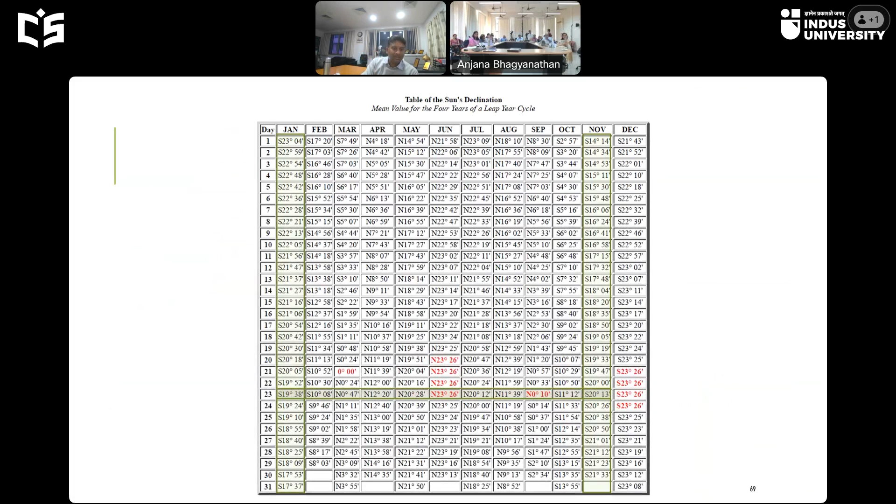So accuracy, I just wanted to mention here. The accuracy required is less than a degree, just a few minutes, for creating the orientation or placing of a given structure. For example, if you take one particular day in January and then November, generally the sun passes through the same position, but there is a slight change, only a few minutes. That few minutes is also taken into consideration when the space is created. That's a very important aspect.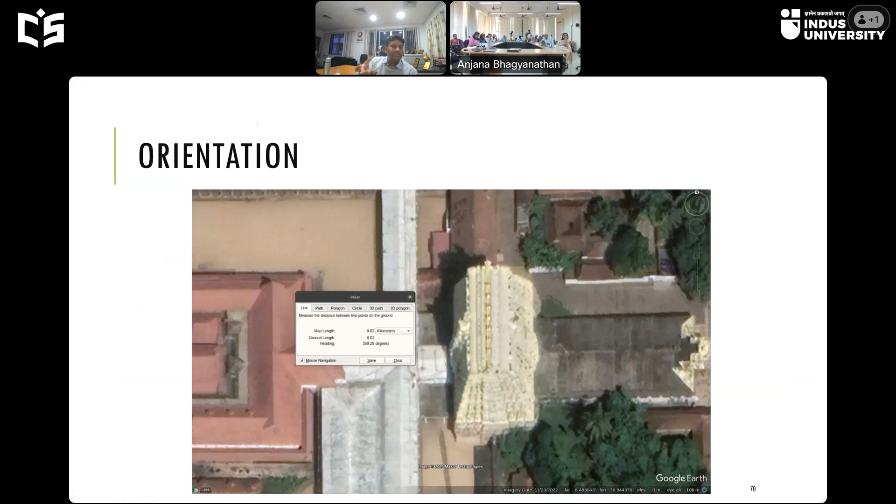That's why if you see it from satellite on Google Earth, the accuracy is remarkable. This is the geometrical north-south line, and this is the east-west line. It's exactly oriented. Whatever small change, 0.7 degrees, that you see is not due to variations - it could be because this is a 3D picture, not 2D, which could cause some error. Also, this was built several hundreds of years ago, so the orientation has also been changing since the earth's orientation itself changes, which would cause a slight deviation in the angle.

So therefore, Rani Ki Vav is also oriented along the same Prachi or east-west line, just like our other temples. That means here water is worshipped, just like we worship other gods. So Varunadeva has been worshipped in this Rani Ki Vav, which shows the importance given to water.

There are two retaining structures on either side, because whenever you excavate something, the soil will fall off, so you require certain retaining structures. How do you erect these retaining structures? Because if you need to excavate, the soil will fall off, so retaining structures are required. But to erect retaining structures you need to excavate first, because retaining structures can only be built from bottom to top - you put one layer, then build on it. That means erection has to happen after excavation, but excavation has to be made before the retaining structure exists. How this situation would have been handled, that I'll try to discuss.

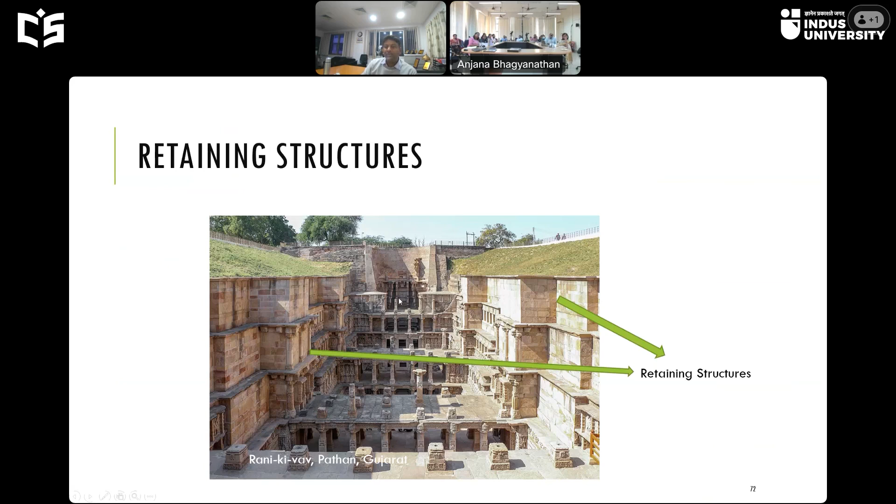Material selection, like stones, is generally done based on the pramanas, as I mentioned, the Pratyaksha Pramana, etc. For sound, they take certain tools and strike the rock, then observe the sound. Based on the sound, they divide the rock into categories - whether it's useful for placing at the bottom, at the top, as pillars, or anything else - decided based on that, along with color, age, gender, everything. Similarly, mortar preparation, brick preparation, all these things are available in prominent Vastu books, including Samarangana Sutradhara.

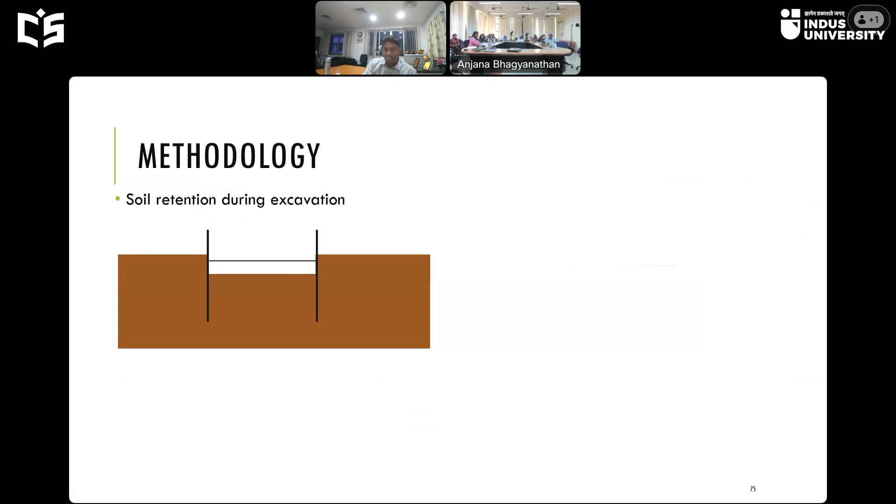As I was mentioning, soil retention is needed because when you excavate, pressure increases with depth, so soil collapses just like this if you excavate something. Excavate deeper and it collapses. So in the present situation, what we do is put in some kind of reinforcement, then excavate, then put in a horizontal bracing system, then excavate further, put in more bracing, and so on, to create the vertical space.

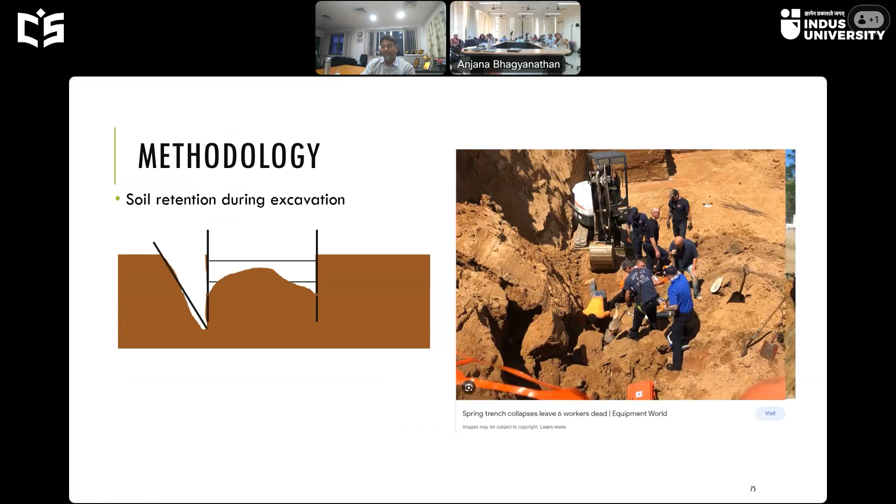And we cannot put any reinforcement, something like steel, because these reinforcements would not last so long.

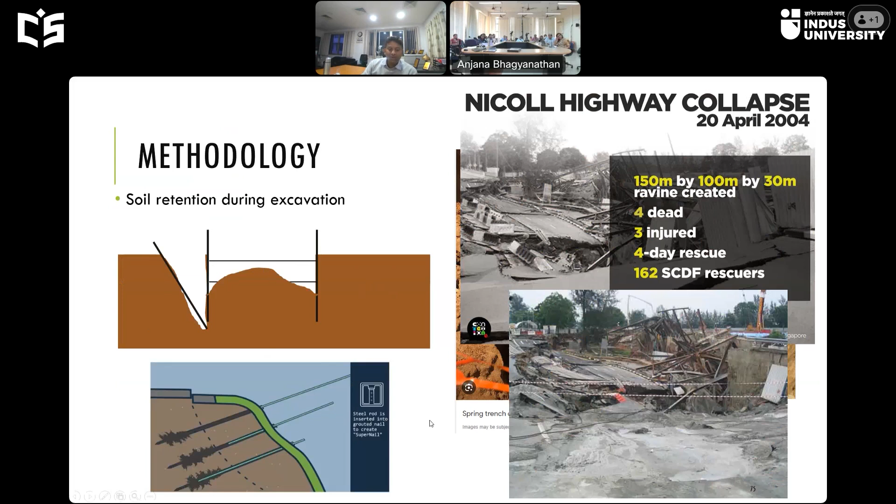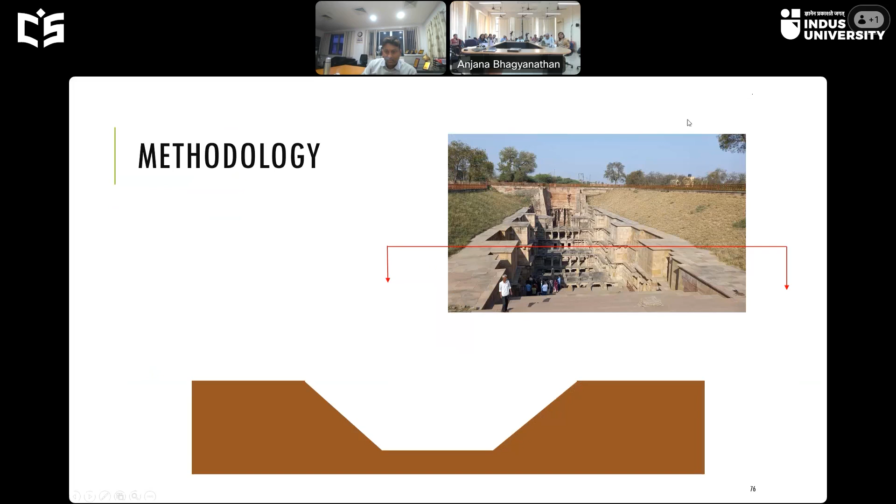So this is a methodology I was trying to explain, how they would have made this based on the knowledge of Vastu. If this is the cross section, what they would have done is excavate all four sides, then mobilize materials like stones, and the stones would simply roll down.

Then after that they would have provided this bracing. Where is the bracing here? These are the galleries. These galleries are supporting these retaining walls, right? And they would have backfilled on either side.

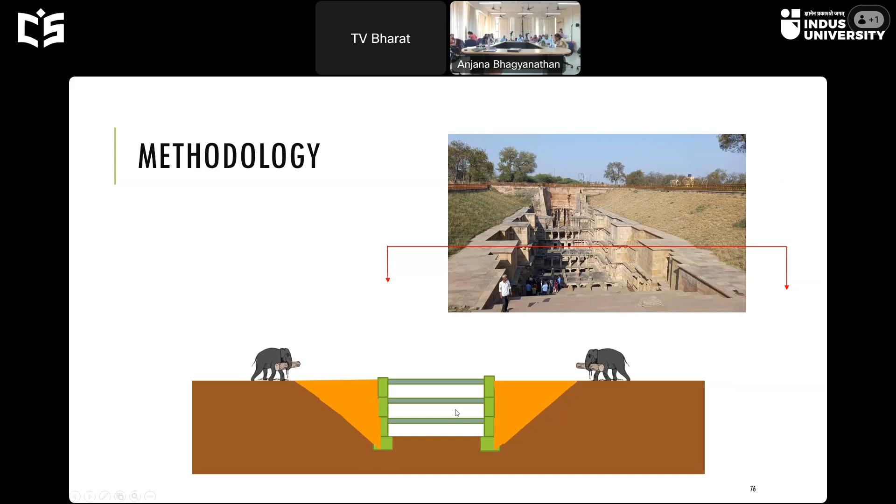Again, they would have extended further and created the space something like this. But this is at one cross section because the depth is varying along this length, so carefully they would have done this all along the length. So then this particular space has been created.

Further, there is a buttress. These buttress walls on either side they would have provided, similar to what you see for trees. Trees have buttress roots to provide strength against the winds, otherwise they would fall off, right?

So similarly, to protect these retaining structures on either side, there is a buttress wall provided using sandstone. And wherever these buttress walls are, you will see that the gallery is connected. This is a bracing system or shoring system, right?

At the end, they provided very large retaining structures, massive gravity walls. These gravity walls actually transfer the particular load back to the foundation. So this is how the whole space has been created.

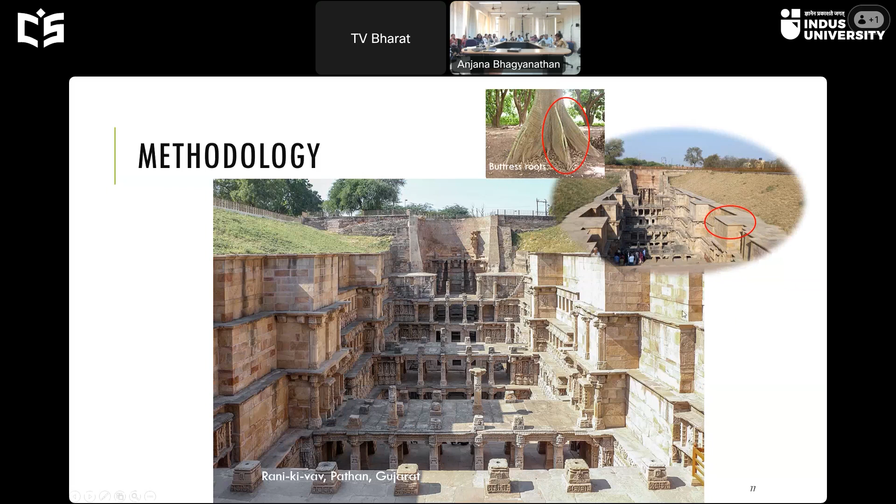So this could be one of the mechanisms, or one of the reasons why these tirthas have been created. And Assam is known for severe earthquakes. We receive earthquakes very often. Now we are used to even the tremors we receive very often.

There is one earthquake called the 1897 earthquake with a magnitude of 8.2, a very high magnitude, where the Brahmaputra river changed its course because of that earthquake. Every structure got flattened, but this particular temple called Sivadol, Vishnudol and Shaktidol stand tall even after that.

So one interesting aspect is why these particular tanks are existing. When I went for one particular site visit, one of the ASI, Archaeological Survey of India, person called me to see the settlements of Maidams.

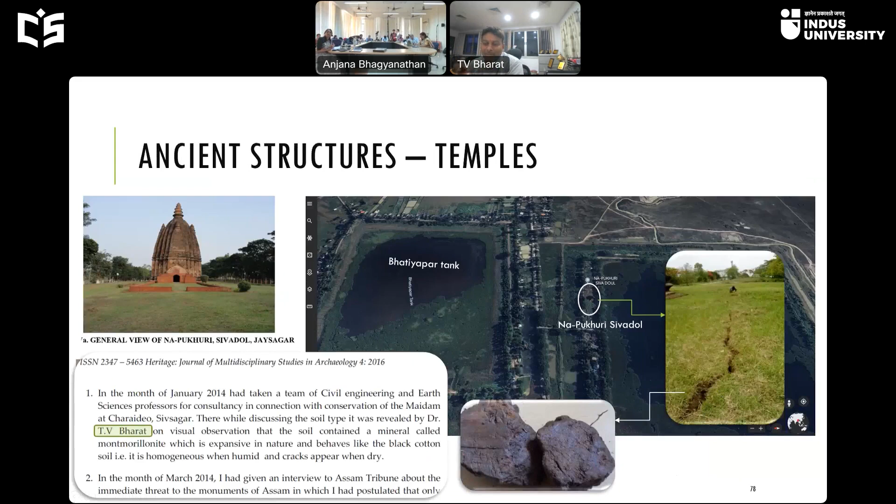I was wondering, for the last temple you mentioned with the two tanks that are supposed to mitigate the effects of earthquakes, are you preparing some sort of diagram that can explain it visually? Yes, actually we collected samples from this particular place also. And we have the cross-sectional views and the borehole depth. Borehole data provides you the soil features with depth, up to 12 meters or so.

So we are doing an analysis by synthetically creating earthquake simulations, and seeing how the ground response and ground acceleration take place. I have another student from civil engineering who is currently working in these places, and he got the samples for me. Otherwise, getting a sample is very difficult because these are very religious places where they would not allow anyone to dig or do anything.

The masonry that is done for the built tanks, how is it? What mortar was used, or was mortar used at all, or was it dry stacked? How does it work? Actually, I'll tell you my hypothesis only, because it's not proven yet.

My hypothesis is that generally, when you take the soil, this is an expansive soil, it's called. Expansive soil means when water comes, it will try to expand a little bit. If you take away the water, it will crack. Actually, cracks appear because the volume reduces, or it shrinks. Generally, we don't construct anything on such soils unless it is stabilized.

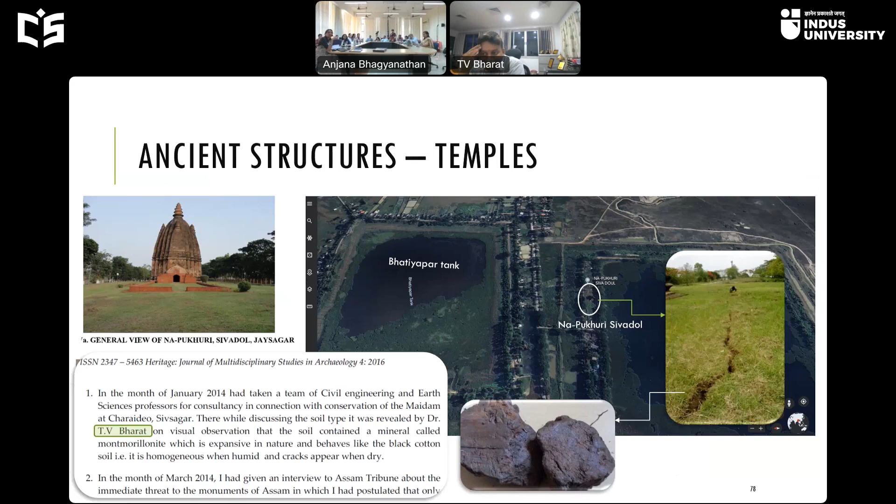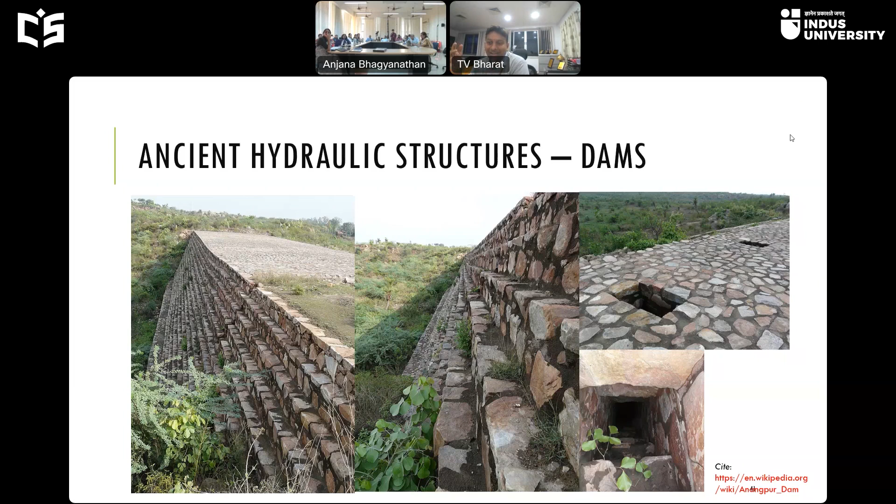So I was asking, what kind of mortar was used in the Anangpur dam? Mortar, okay, mortar. These mortars are organic. Interestingly, the same mortar existed in Ahoms' construction and in Anangpur and elsewhere. This consists of gud, triphala, lime, and ghee, all these organic components, and they lasted for several years. And the reaction that happens between these materials is very interesting. This is documented in Brihat Samhita and many other Vastu books.

The same mortar has been used everywhere, but the proportions are not known. The components are known, but the composition of each individual thing is not yet known. We have done some experiments. We got somewhere around 4 MPa, 5 MPa in some cases. We got only a few kilopascals in a few cases. So depending on the composition, the strength would vary. And they also used urad dal, the same lentils you use for idli making.

Sir, I was wondering, for the purpose of modern construction, would this mortar be sustainable? If they sustain for thousands of years, why not? No, sir, modern day construction involves mass production. There's a lot more construction happening than in the ancient era. See, the construction of, for example, Rani Ki Vav took place over 20 years, but it survived for thousands of years and it will survive for some more years. With modern day techniques, you want a very fast thing, you have to construct something within 1 year or less, but it hardly lasts for 60 years or so.

If you want something with very high longevity, I think we need to invest more. Another option is that you use 3D printing and such technologies, and modern equipment combined with this ancient technology would help in speeding up this process, right? But this is more sustainable, that is sure, because the mortar itself is completely organic. Even if it degrades after some more years, it will get absorbed into the environment naturally.